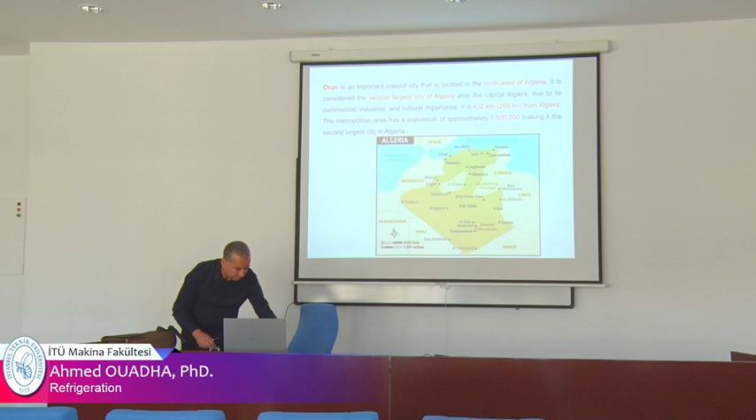Is it there? Yes. Oran is here in the west of Algeria, the second biggest city in Algeria. There are some photos of the city, and we talked with Ikram about the mosque. These are two mosques from Oran, and this one has been built by a Turkish company, Tosyali. You know Tosyali, the iron and steel company.

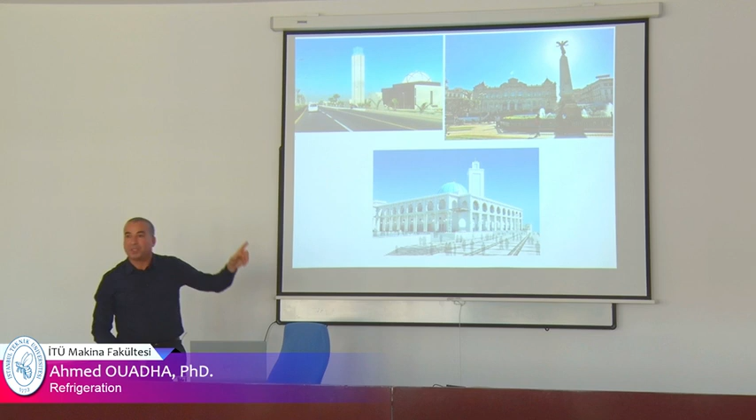Oran is also an industrial pole where there are liquefaction plants of natural gas. You know that Turkey is a consumer of natural gas from Algeria. They have a pipeline from Russia, I think, and the LNG, or liquefied natural gas, is from Algeria. Tosyali, the Turkish company, is also in Oran.

In Oran there are three universities, among them USTO, the University of Science and Technology, one polytechnical school, and an institute of telecommunication. This is our university, University of Science and Technology. It's a big one, there are 7 faculties, one institute of sports, and a language learning center. There are about 20,000 students in our university.

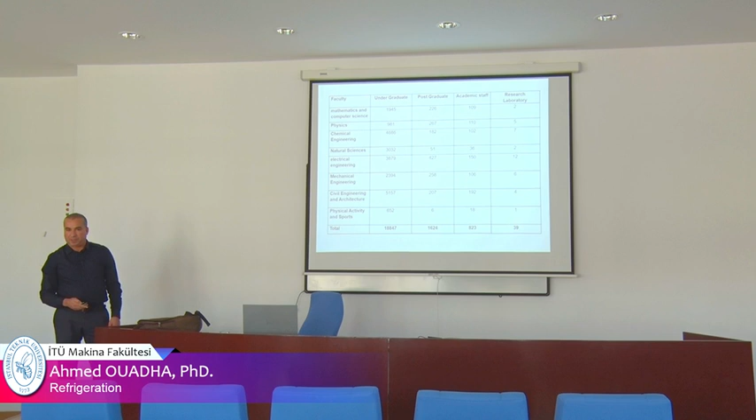I am also the head of a research group on marine propulsion, and my work focused on thermodynamics, the application of thermodynamics in refrigeration and cryogenics. Here, for example, there is a cascade refrigeration cycle. It is a liquefaction plant, the first one built in the world.

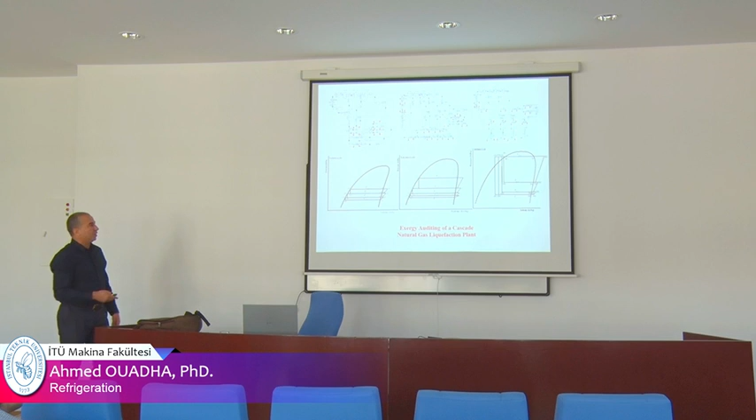It was in Oran in 1964, built by a French company, Technip. I also worked on LNG boil-off reliquefaction. This is a system used on board ships.

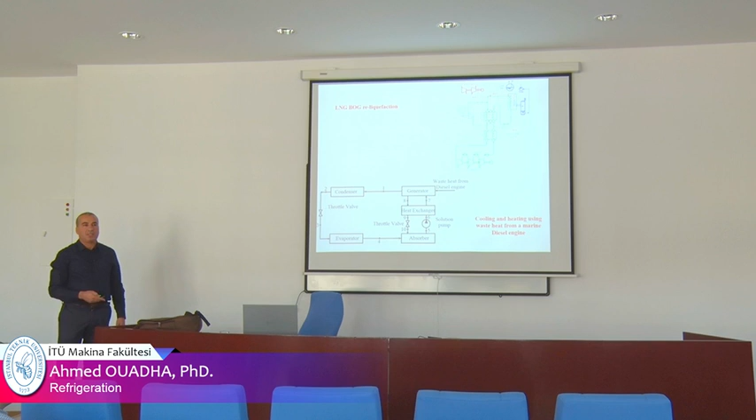We also studied non-conventional cooling systems, about absorption refrigeration systems, and waste heat recovery systems. On board ships, there is a lot of waste heat that we can recover to produce energy or to produce a cooling effect using absorption refrigeration.

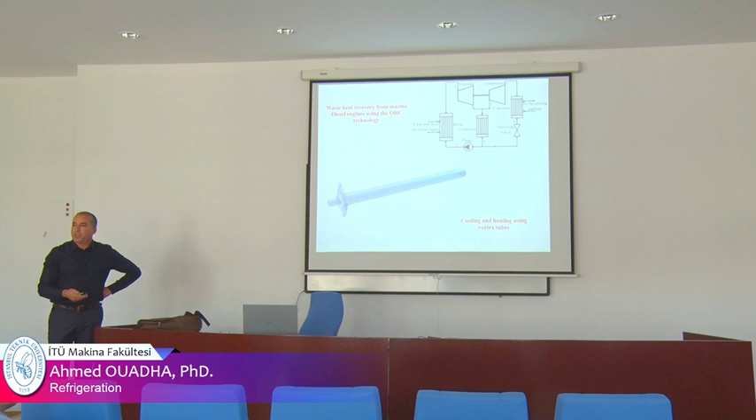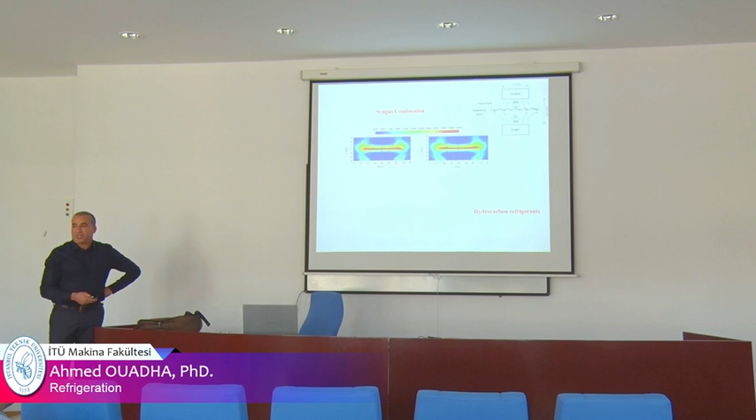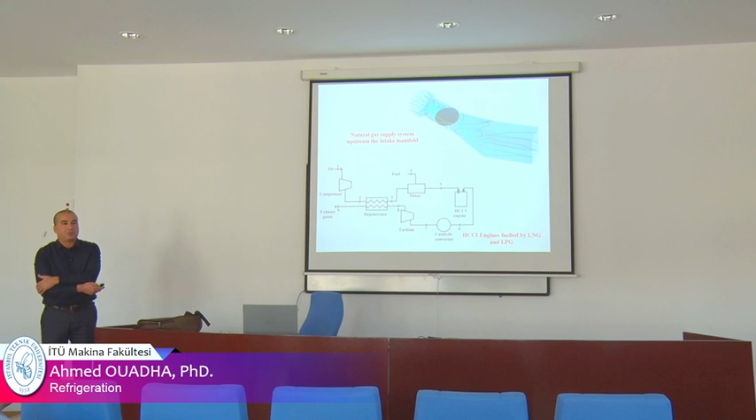We also worked on vortex tubes, which we'll see tomorrow. It's a means of producing cooling and heating. And on heat transfer, organic Rankine cycles, hydrocarbon refrigerants, and combustion. I was also in Spain for 6 months for postdoctoral training, where I worked on a supply system for a dual fuel diesel engine.

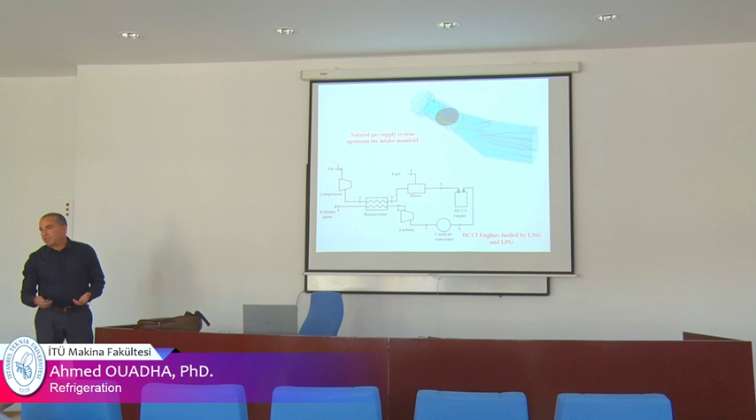Now we go directly to our lectures. I divided the lecture into 4 parts. We are going to see the first one, on fundamentals of refrigeration: what does refrigeration mean? The second one is about thermodynamic properties of refrigerants, the fluids used in refrigeration systems, and the cycles and schematic diagrams of single stage refrigeration systems. Then we go to low temperature refrigeration systems, and we finish with non-conventional refrigeration systems.

So I begin with the first chapter. As you know, in thermodynamics there are two principles or laws that are very important, the first and the second. Sometimes I ask questions, so you can participate, it's a lecture. The first one is the first law of thermodynamics: energy conservation, meaning that the energy that enters the system is the same that exits the system, simply. And for the second law of thermodynamics, there are many definitions.

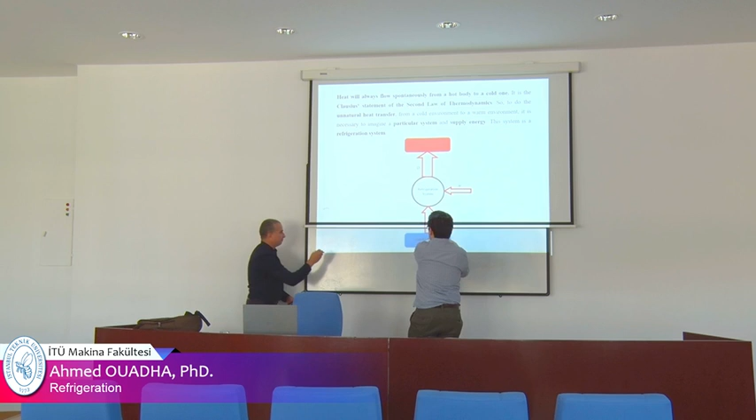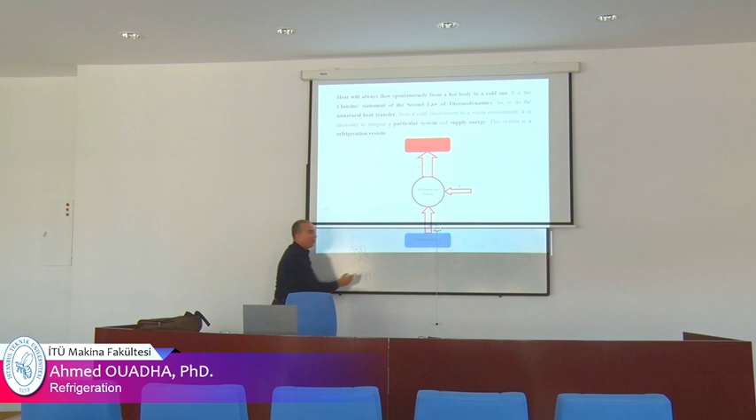It is the inverse, or the opposite, of an engine. In an engine, it's also work between two sources, a hot source and a cold source. But in an engine, we give heat, the energy in the fuel, after combustion. There is an energy, there is a heat. We give heat here, and a part of the heat is converted to work, useful work, and the other part is rejected to the environment, the surrounding.

But in refrigeration it's the opposite trend. We give energy, then the machine or the system will remove heat from the cooling medium.

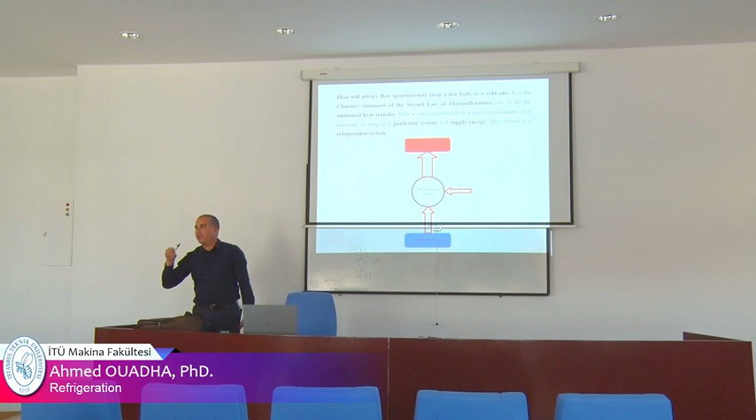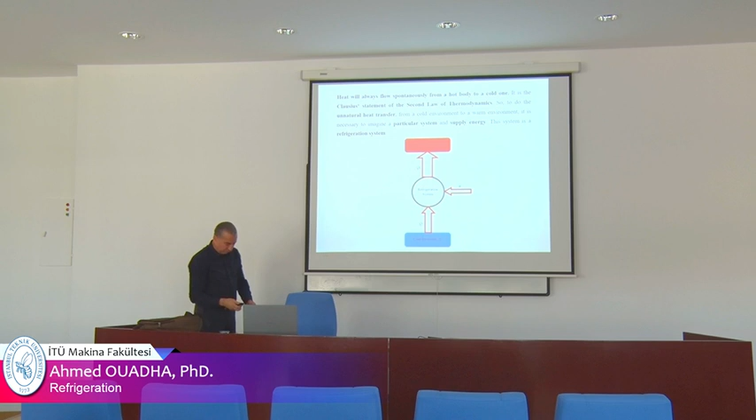So the first person who thought about thermal systems was Carnot. You know the Carnot cycle? He developed a theoretical cycle called the Carnot cycle. A Carnot cycle is composed of two, or four, theoretical processes: two adiabatic reversible processes, and two isotherm processes.

This is adiabatic reversible, 1-2 adiabatic reversible, and 3-4 adiabatic reversible. Adiabatic reversible means the entropy doesn't change, there are no losses, entropy stays constant. And two isotherms here, 2-3 and 1-4. This is the reversed Carnot cycle. The direct Carnot cycle is for engines.

So in engines, we define the efficiency. Efficiency is equal to the work or power produced divided by the energy supplied. But in refrigeration, we define another parameter, another criteria: the coefficient of performance. It's the ratio of the heat removed to the energy supplied.

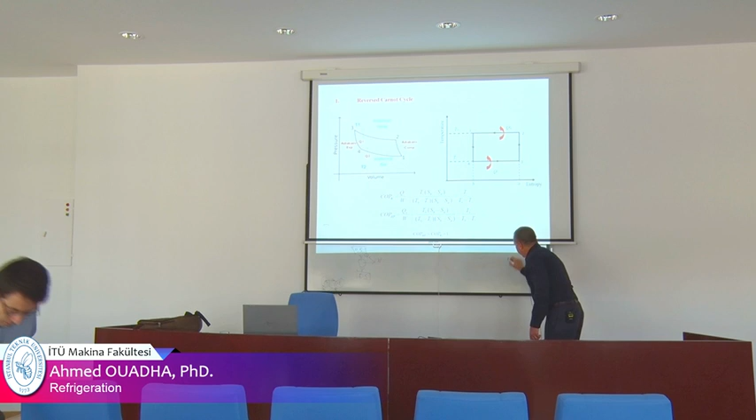So we have, in a temperature-entropy diagram, the Carnot cycle, the reversed Carnot cycle: points 1, 2, 3, 4. And I'll define another point A and B. So the heat removed from the cooling space is QL, and the heat rejected to the heating medium or the environment is QH.

So QL here is that area, a rectangular area, meaning that distance multiplied by that distance. Here I define two temperatures, TH and TL, low and high temperature. So this QL is the area for 1-B-A-4. It's a rectangle, so the area is TL multiplied by SB minus SA. The same thing for QH is the area.

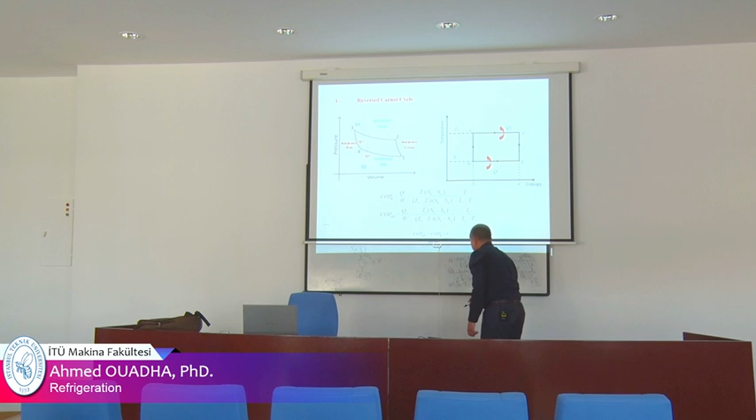QH is all this area, 3-2-A-B, equal to TH times SB minus SA. And we can define W, the work done on the cycle, as the difference between the two, or simply the surface inside the cycle. So it's TH minus TL times SB minus SA. And if we do the definition of the coefficient of performance, we get the result: the coefficient of performance for refrigeration mode is equal to TL divided by the difference between the temperatures.

And for the heating mode it's TH divided by the difference of temperature. This means that for a Carnot cycle, a machine that works on a Carnot cycle, the coefficient of performance depends only on the levels of temperature, not on the refrigerant, only on the temperature levels. And there is a relation between both: COP heat pump equals COP refrigeration plus 1.

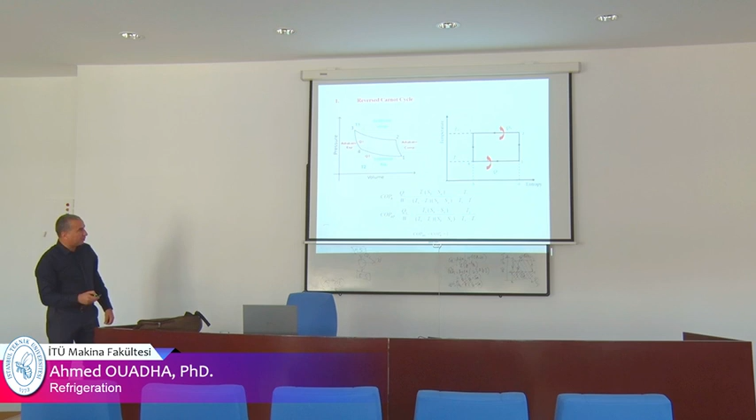But we'll return to the Carnot cycle in the second chapter to say that it is impossible to have a machine that operates on the Carnot cycle.

Now we go to the thermodynamic properties of refrigerants. Refrigerants are the carrying medium, the heat carrying medium that carries heat from the cooling space to the environment.

The fluid used in a refrigeration system is called refrigerant, simply refrigerant. To use the refrigerant, or to study a refrigerant system, we need to calculate thermodynamic properties at points of the cycle 1, 2, 3, 4.

To calculate thermodynamic properties, we have three methods: using thermodynamic diagrams, or using thermodynamic tables, or using a set of equations of state.

Before detailing these methods, in engineering, when we use a fluid in any study, we have two possibilities. We consider the fluid as an ideal gas or as a real gas.

We consider the fluid as an ideal gas or as a real gas.

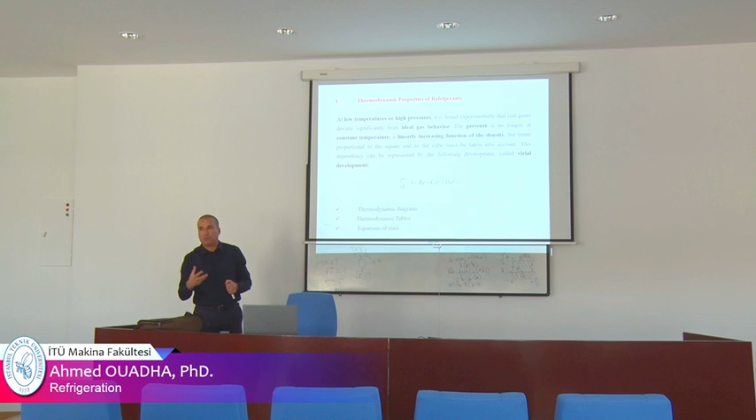To calculate a system where the fluid is a real gas, we have three possibilities: diagrams, tables, or equations of state.

For diagrams, there are six diagrams. Among them, the pressure-enthalpy diagram is the most used in refrigeration systems.

It is the enthalpy H, pressure-enthalpy diagram. It's like this.

It has a shaped curve that limits the phases. Here is the vapor or gas phase. Here is liquid plus vapor, and here is liquid.

And this point is the critical point. It depends on the refrigerant — each fluid has its own critical point. And the same thing applies to each body, each matter has a diagram with a critical point, triple point, etc.

So here, the advantage of diagrams is that we can see the evolution of elementary processes. For example, in a heat exchanger, pressure remains constant.

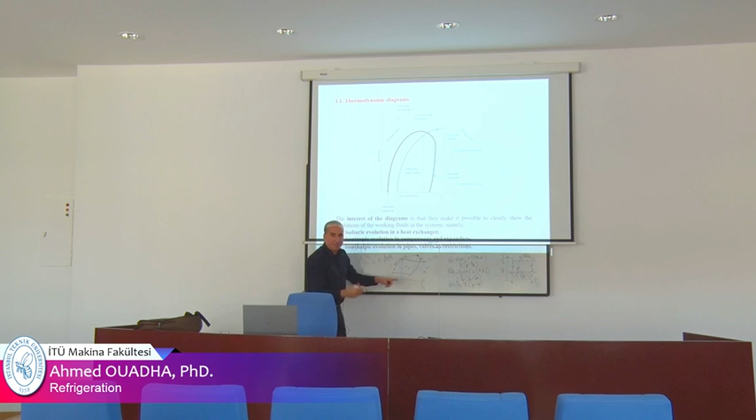And this, from here, is the saturated vapor. So here is 100% vapor, and here it's 0% vapor.

The quality X, X is the quality — it means the mass of vapor contained at a point.

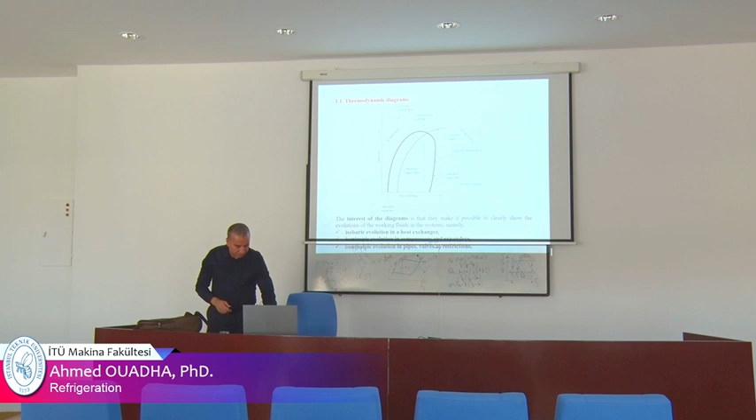The second means of calculating thermodynamic properties of real gases is the utilization of tables. Tables are prepared in two parts. One part is the saturated properties, meaning it gives only properties on this curve.

This is the saturated properties, or properties of saturated substances. Here, for example, is propane. And the second one is the properties of the gas phase, from this part here.

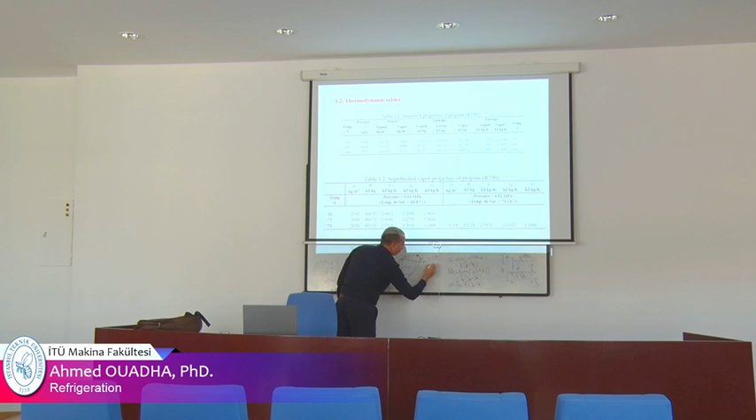Using the two tables, we can define any properties. When using the first one, we need to know just one property to determine the other properties. For example, if in the first table I have temperature, I can define the other parameters like density, enthalpy, and entropy.

But in the second table, when I am in the gas phase, I need two parameters to determine the other parameters. For example, I need pressure and temperature, or pressure and another parameter, for example entropy.

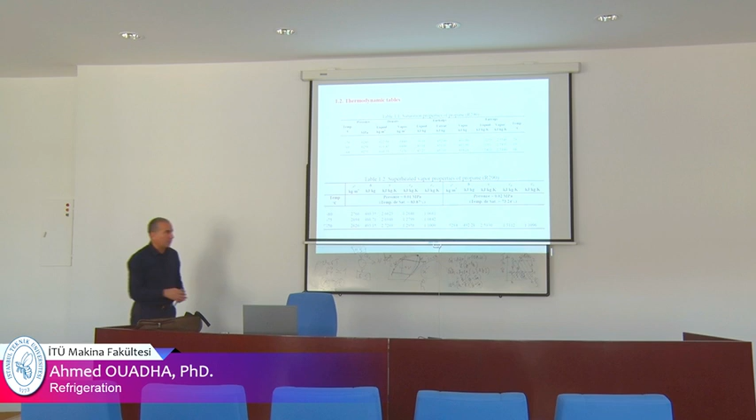And the third one is the utilization of the equation of state. You know that the origin of the equation of state was van der Waals, who developed an equation of state. What did van der Waals do?

We have the equation for an ideal gas, PV equal to RT. The first point to consider was that an ideal gas has no interaction. Interaction is the second one.

The weight: he corrected the weight by another parameter. The weight, meaning the volume of the molecule, corrected by another parameter, parameter B. And he corrected the pressure, because the interaction has a direct relation with pressure.

If the pressure is big, then there is interaction between molecules. So he corrected the pressure with another parameter, A divided by V squared. And he developed his equation of state, the first one developed.

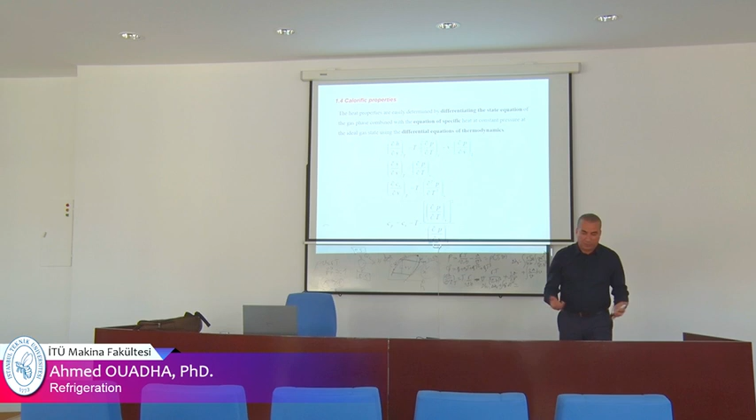It means that for enthalpy, if you are using a reference, for example an American reference, you should have another reference state. If you use a reference from Russia, you get another reference state. But the delta H is the same. So the reference state is arbitrary. You can choose any reference state, the delta H will be the same. You understand?

It means that values of enthalpy from one book or another book may change, they may be different, but the difference will be the same, I think.

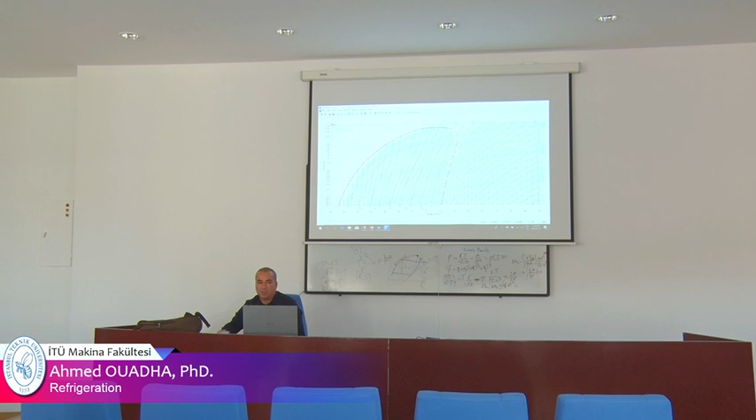For thermodynamic properties here, we have diagrams and tables. Diagram, for example, for enthalpy - pressure enthalpy, temperature entropy, and here is enthalpy entropy, the most used in Rankine cycles. This one is used for both, and this one, log P vs h, is most used for refrigeration. For example, I use this one. I have to choose among refrigerants - I use any refrigerant, for example this one, and I get the diagram. You can print it and use it for your work.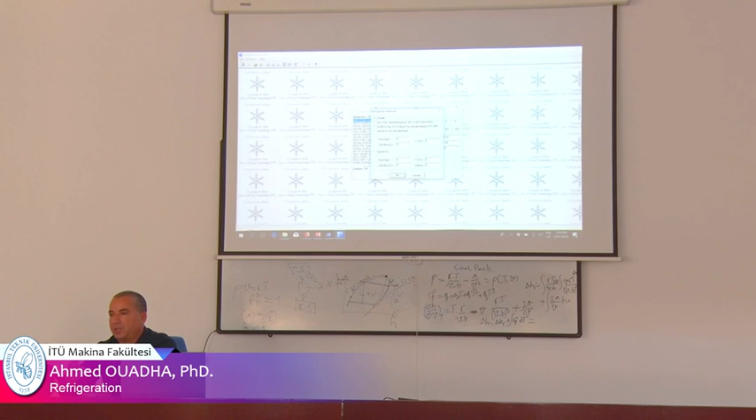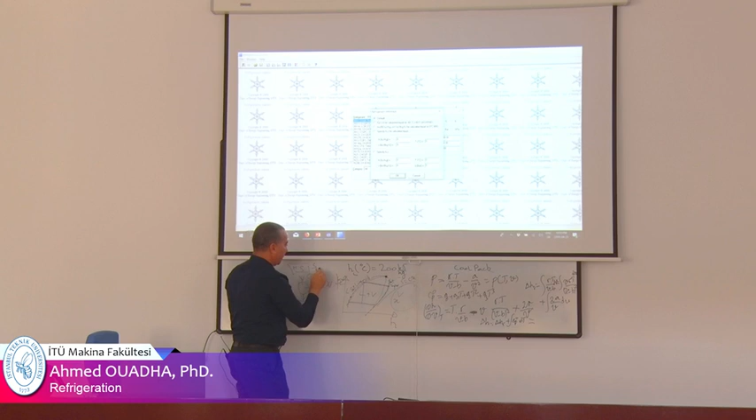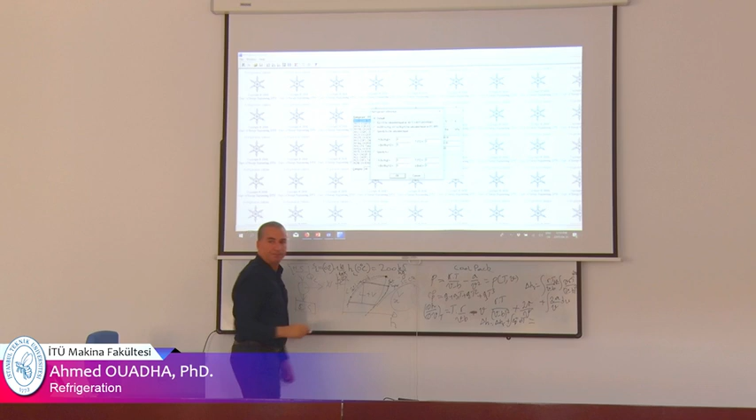This is for diagrams. I can also use tables, here for saturated tables. For saturated tables, I can choose temperature in centigrade degrees or in Kelvin. I can use pressure, and set the maximum and minimum temperature. And the reference here is the reference state - I have the default. The default uses the reference from the International Institute of Refrigeration of Paris, a French institution for refrigeration. The default is: H at the saturated liquid at 0 degrees equals 200 kilojoules, and S, entropy, at the saturated liquid at 0 degrees equals 1 kilojoule per kilogram Kelvin.

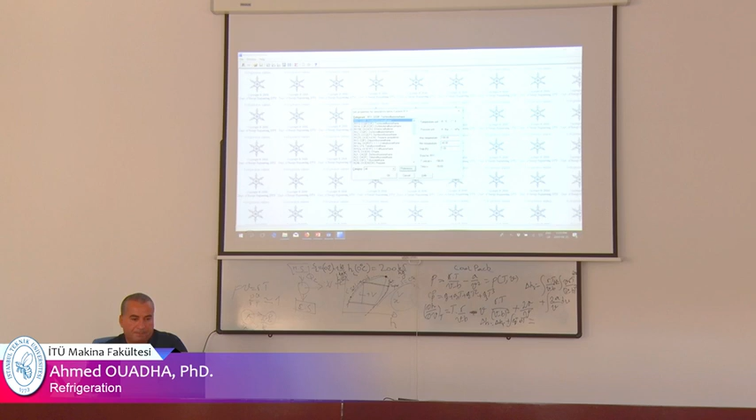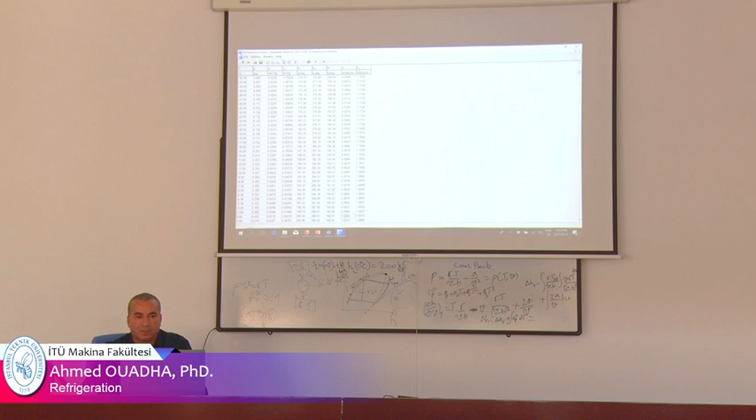For example, I take the default here, and I'll verify that at 0 degrees, the saturated liquid enthalpy is 200 and entropy is 1. So, OK - I go to 0. Here, 200 and 1 for the saturated liquid, SL and HL.

It is arbitrary. I do the same thing for the same refrigerant, but I choose another reference. For example, for the American Society of Heating, Refrigeration and Air Conditioning Engineers, ASHRAE, they use HL and SL equal to 0 at minus 40 degrees. I choose this one. OK, I go to minus 40. For some refrigerants there is no minus 40, so I choose another one - it's an intermediate one for LNG, correct? R14. R14 is an intermediate refrigerant for LNG production. I use it.

What is the difference between this thermodynamics table and these data tables? He is showing how to use them - it is much more practical. Yes, and we can use another reference, this one by default, or you can specify your own reference, because it is arbitrary. But the difference between two values, delta H, is the same for all references.

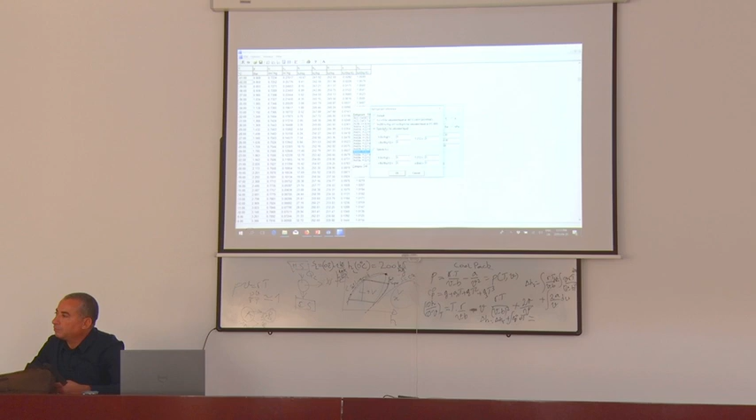What is your question about values of temperature? It's not available in the thermodynamic tables generally. In thermodynamic tables, there are generally two types for the saturated region: from the triple point to the critical point, it's limited. The other one, superheated vapor or gas, you can get unlimited values as you like. My question was, in the thermodynamics table we generally use from Cengel's book, the temperature values go from 0 to 1000 or whatever it is, but here I'm looking and there are negative values of temperature.

It's the fluid - it's a characteristic of the fluid. Each fluid has its own properties. Some fluids have very high critical points. Take the case of ammonia, for example - ammonia has a very high critical temperature, exceeding 100 degrees. For other fluids, for example carbon dioxide, the critical temperature is around 30 degrees. So the table for carbon dioxide will be shorter than for ammonia. It's a characteristic of the fluid.

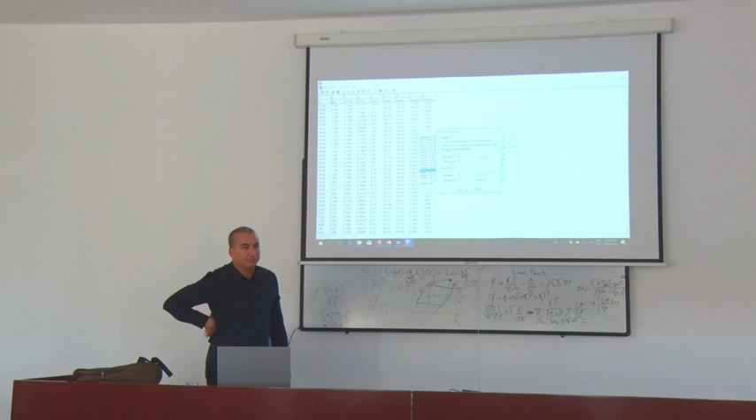Other question? If we can select the reference arbitrarily, how could it promote the research?

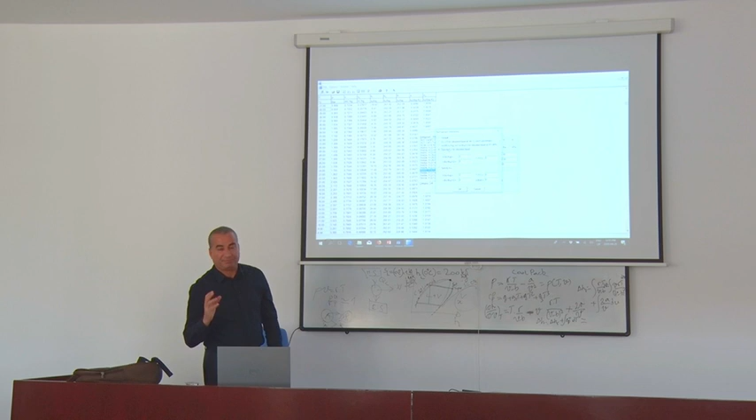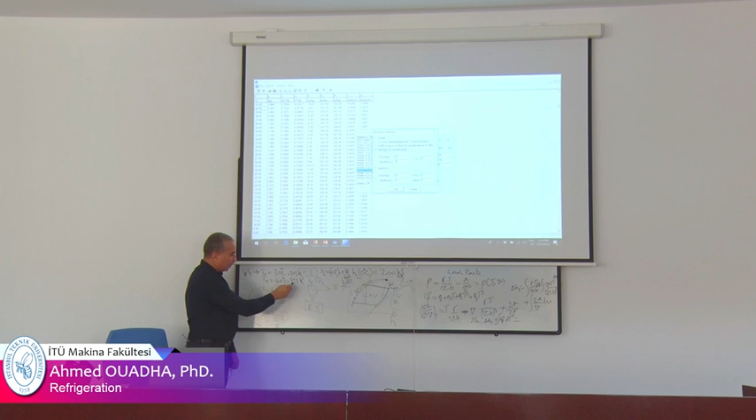It's the same thing, the result is just the same because we need delta H. I can explain it in temperature. T1 is 40 degrees, in Kelvin that's 313. T2 is 30 degrees, which in Kelvin is 303. The difference T1 minus T2 or T2 minus T1 equals 10. 40 minus 30 equals 10, and 313 minus 303 equals 10.

So when you calculate the difference, the delta, the reference is not important. It's arbitrary, really arbitrary. You can choose any reference state. The problem is that when you use books, the origin of the book defines the reference. If you use an American book, like the ASHRAE book, it means zero enthalpy and entropy of liquid are equal to 0 at minus 40 degrees. If you use a French book, or another book, you have 200 and 1 for enthalpy and entropy.

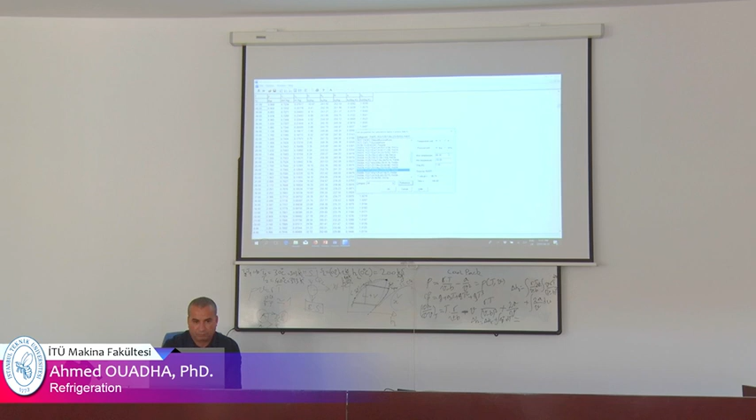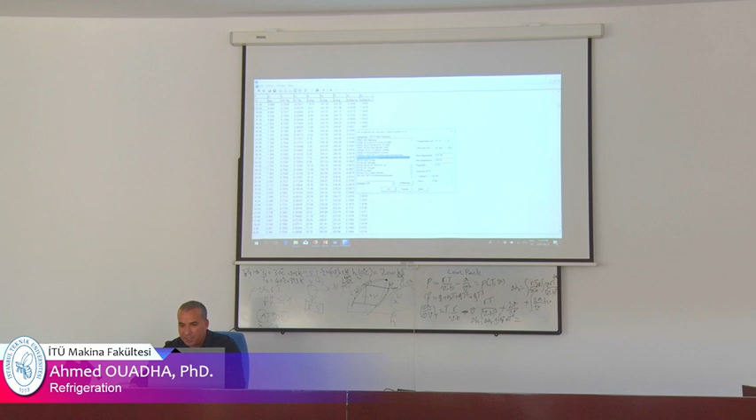For your question about tables, I'll give you examples. Let's go to saturated tables. I choose among refrigerants, for example ammonia. The critical temperature of ammonia is 132, and by default it goes from minus 46. Minus 46 is the normal boiling point, which is the temperature that corresponds to 1 bar, the atmospheric pressure. For ammonia that's minus 46.

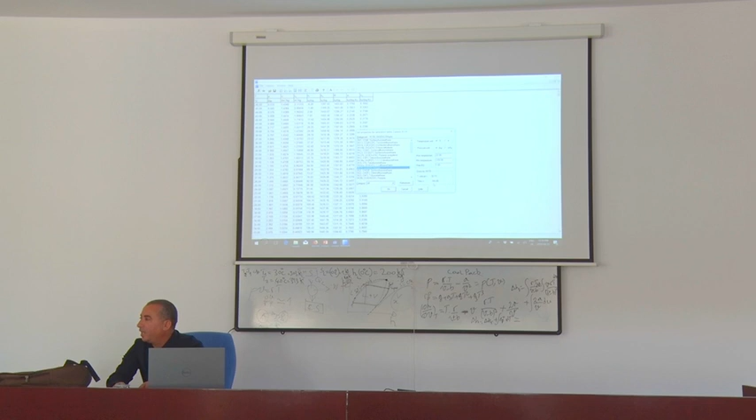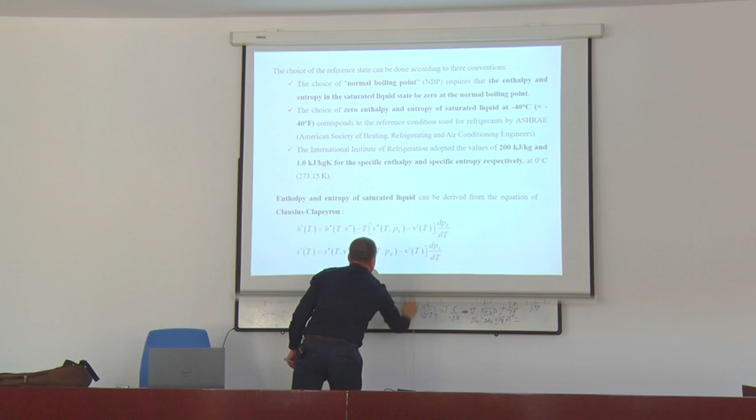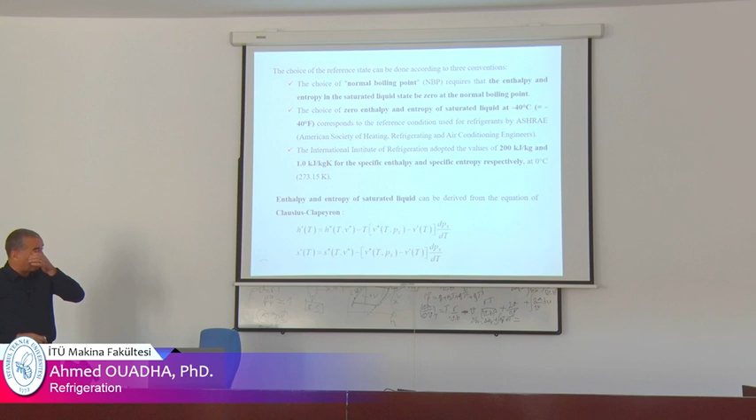So I said that the reference state is arbitrary. Then we need to calculate enthalpy and entropy on this curve. This enthalpy I calculated is for the gas phase. Then I need to calculate on the saturated curve. I use the Clausius-Clapeyron equation, this equation and this one. For this development I use just two equations: Cp and P as a function of T and rho, or V. Then I use the others, Ps as a function of T, which I have to derive, and I use here the liquid specific volume, to get double prime meaning saturated vapor, and prime meaning saturated liquid.

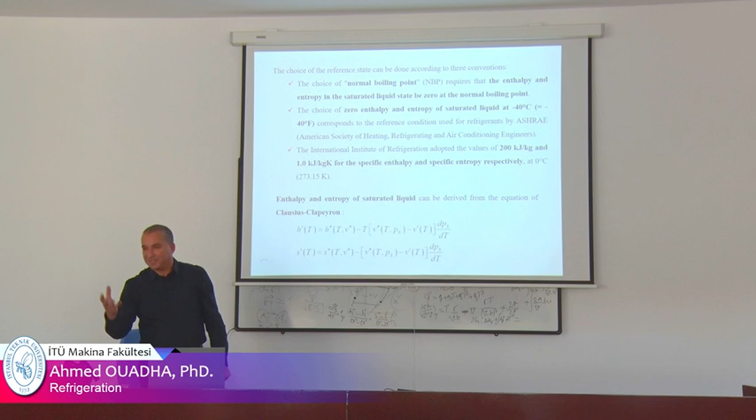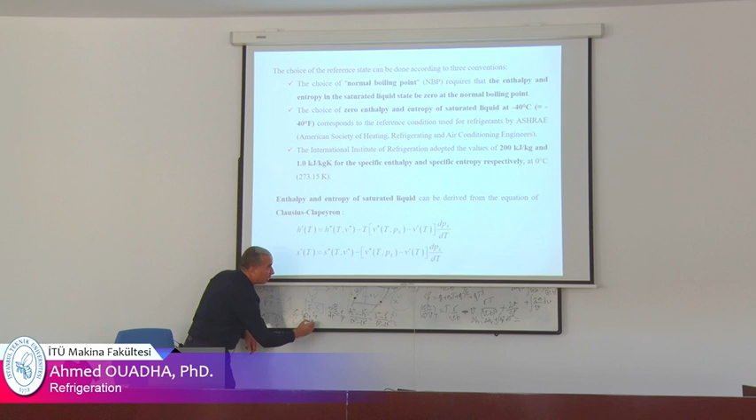So we use the Clapeyron equation, dPs/dT equals T, H double prime minus H prime, over... the same form applies for entropy. From this we can define H prime and S prime. The same thing applies for saturated liquid. You can find in a book SG in the American convention, or SF, not G, SF. In another book you might see SL. For vapor you can use double prime, SG, or SV.

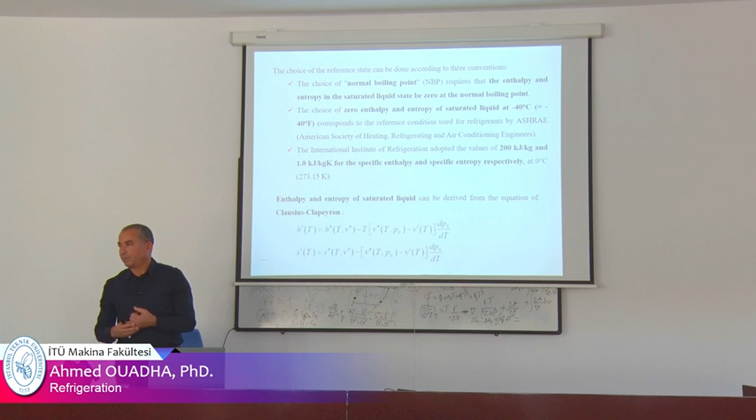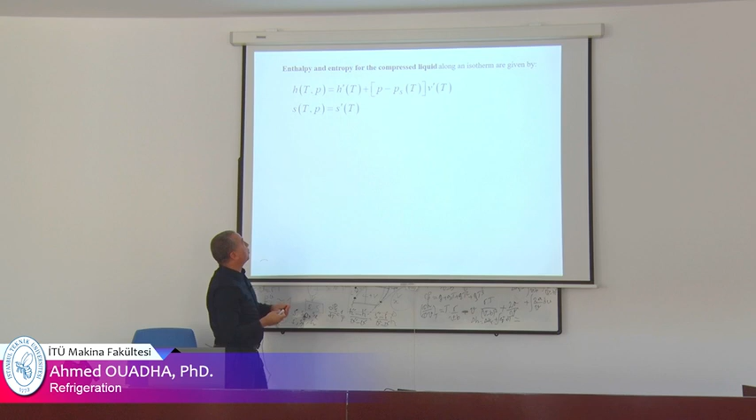Then, sometimes in a refrigeration cycle, we are in a compressed liquid state. In compressed liquid, we need properties, and we calculate them from these two equations for enthalpy and entropy. So now we know how to determine H in each situation: in gas, in compressed liquid, saturated, or inside the curve.

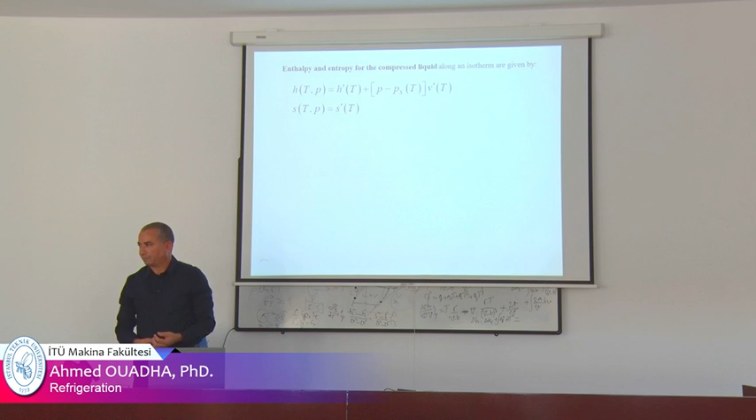So we can pass to another chapter of the lecture, the refrigeration cycle. When I design a refrigeration system, I can calculate the cycle and its performance, because I know how to calculate thermodynamic properties. So the second chapter is refrigeration.

Any question? Do you want to continue or have a break? No? As you like. For students, do you want a break? Yes. Can we? Yes, you can have a break, and we'll continue. For how long? 10 minutes maximum, and for you just 2 or 3 minutes. 10 minutes. I want a question, I am sure that this...